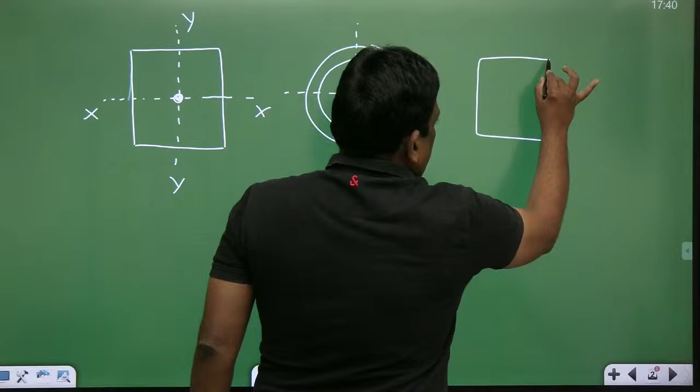Now, dear students, let us take the C section. There are two principal axes, principal centroidal axes. Let us assume this is one axis, XX, and this is the other axis, YY. Now, if you fold the top onto the half, you get exactly this. So it is symmetric about this axis.

What about this axis, YY axis? If I fold this, am I getting this portion? Absolutely no. When I fold this, I don't get this. This means this is not the axis of symmetry, and this is the axis of symmetry. So it has one axis of symmetry.

Now let us take this L section. It neither has any axis of symmetry. If you fold this, you are not getting this. If you fold this, you are not getting this. It has no axis of symmetry.

Now let us see what is happening. This concept which I am going to discuss is very important when the thickness is very, very small - for thin members. For example, please understand.

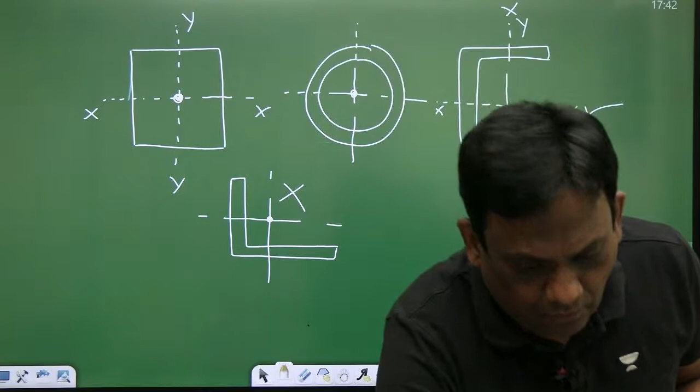Okay, no problem. Now observe here, sirs. Let us do one thing. Dear students, now let us also take this section.

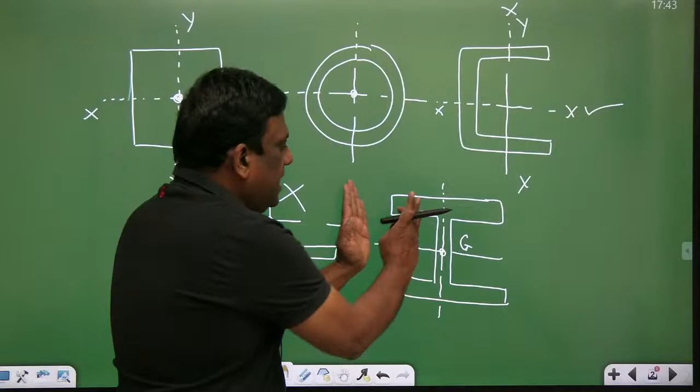Let us take a symmetric I section. What do we mean by symmetric I section? Look - these flanges are exactly the same thickness, same size. This is one axis, principal centroidal axis, and this is another axis. So if I fold the top one, I get the bottom one. If I fold the left one, I get the right one. So it too has a double axis of symmetry.

Whenever we have a double axis of symmetry, when the member is loaded like this - listen carefully - there is a member, say it is a rectangular section, or square section, no problem at all, or it is something like this, a circular section, no problem at all. Now...

Let us load like this. The load is passing through this G, the centroid. You will see that it simply bends, and you don't find any twisting. For example, let us take this rectangular section and apply a point load.

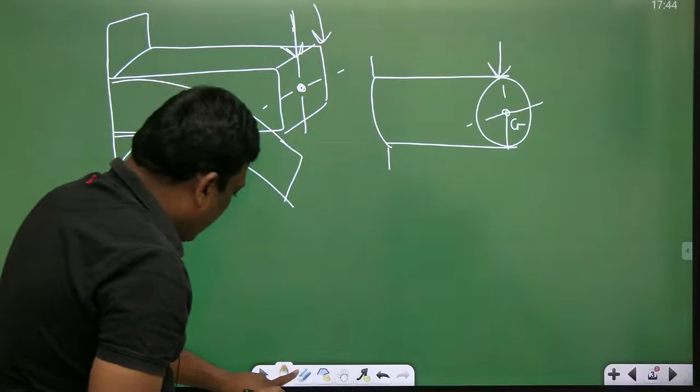It bends. Very good. Now something unusual is happening. But before we start that, let us try to understand this. Instead of applying a load here, let us apply a load somewhere else - let me erase this.

Instead of applying a load here, let me apply it eccentrically - this is known as eccentric transverse loading. This is transverse loading, this is axial loading. Beams are transversely loaded members. Let me apply a load like this. When I apply a load like this, you will observe very clearly. Now I'll replace this with something like this - look, this is the applied load.

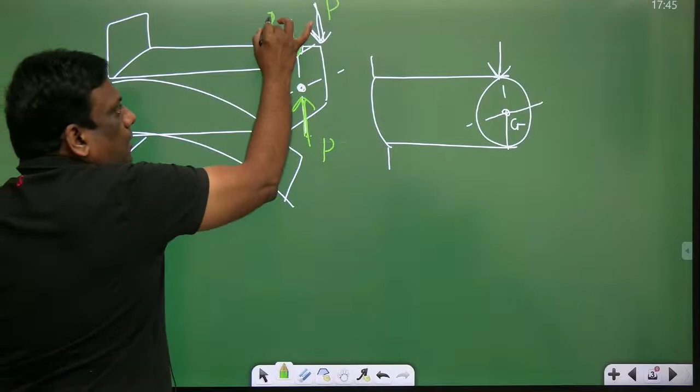From mechanics, if I replace this with two equal and opposite forces, look at what is happening - there is no net effect of these two. There is no couple formed by these two green forces, and the upward and downward P cancel with each other, so there is no net effect. Now look at what these two are trying to do - they are trying to twist this member. This means even when the member has double axis of symmetry, if the load is not passing through the centroid, and if the load is eccentric, then you find some twisting of the member.

So please, my dear students, don't think that when the load is passing through the CG, in case of double symmetric sections, there is no twisting, there is only bending. But even when you have double axis of symmetry, if the load is not passing through G, if it is passing somewhere else, it will twist. Very good, I think you have understood very clearly.

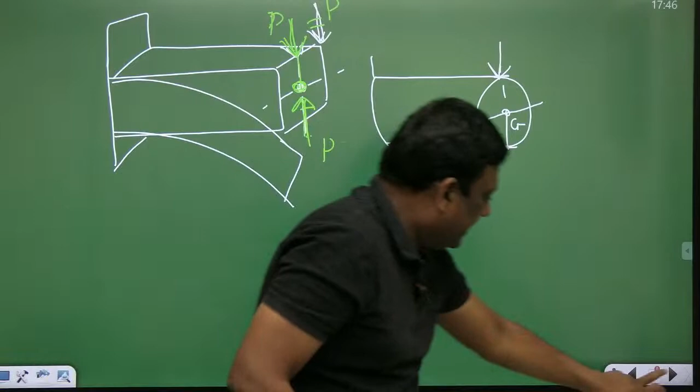Now whenever a member has two axes of symmetry, when the load is passing through CG, there is no twisting, there is pure bending. For example, take a circular section, let it pass through this, and take an I section which is symmetric. Both flanges are equal, and when the load is passing through CG, it's like this. I'll show you very clearly.

Today I will try my level best to give all the things about shear center. But the only thing, look here.

Now look, sirs, this is the member. Now I am applying a load here. Observe here, what is happening? Simply it is bending, because the load is passing through this G, and therefore it is passing through this. It has two axes of symmetry. So therefore there is only bending, but there is no twisting.

Exactly, wonderful my dear students. Don't worry about all these things, you will get everything in a crystal clear manner, it's my promise, but you should have patience. But something unusual is observed here.

Please look, sirs, please understand. Let us take a C section. Now you know this is one principal axis. This is another centroidal axis because CG is passing through this. But you know this is the axis of symmetry because if you fold this, you get this. But this is not the axis of symmetry, so when you are folding, you will not get this.

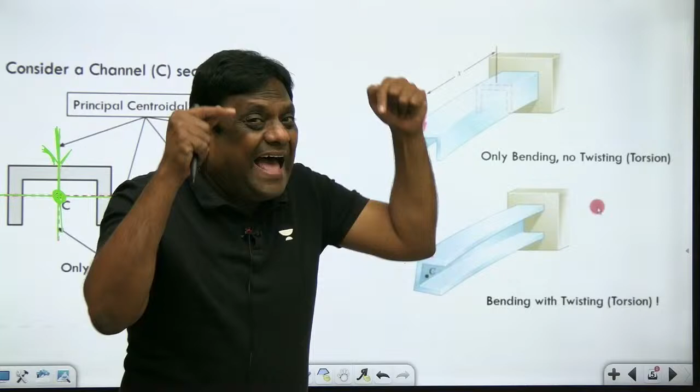Now look, sir, when the load is applied along the axis of symmetry, it's something like this. You just find bending, you don't find any twisting. You just find bending. When the load is applied along the axis of symmetry, this is the axis of symmetry, observe here. When you fold, you get this. So when you are applying the load along the axis of symmetry, you don't find any twisting, you just find bending. It's something like this, my dear students.

I will take this, let's see once. I will take this, look. Now this is one axis and this is one axis. Sorry, no problem, don't worry sirs, I will take care of everything, there is no need for you to worry. Look, now observe here, please observe.

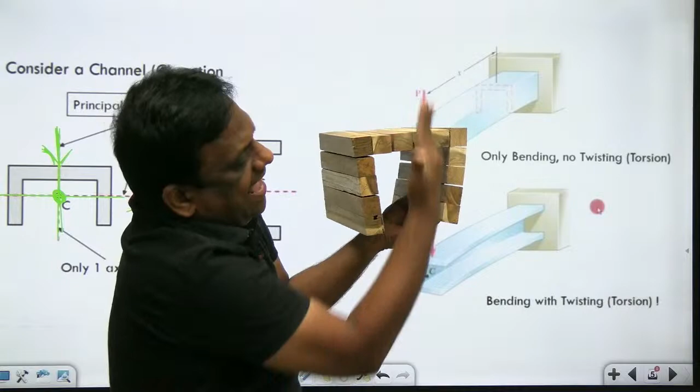This is one axis, so if I apply a load like this, this is the axis of symmetry, this is the axis of symmetry. If I apply a load like this, simply it bends. But now what we do is just try to reverse it. Let us take this, now you know centroid is somewhere here. This is one axis, this is the axis of symmetry. This is one axis, but this is not the axis of symmetry.

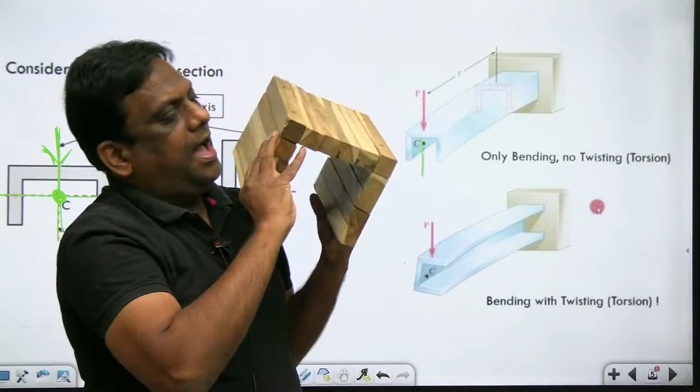Now I will apply load here. You just see, take casing pipes, electrical casing pipes, if you want to observe you can do that experiment. Now instead of applying a load along the axis of symmetry, look, now I will apply load like this. Look, now I will apply load like this. See once, now I will apply load like this. Is it along the axis of symmetry? No. So when I apply load like this, which is not the axis of symmetry, you find something like this.

Look, you just see warping, meaning it is twisting.

In which case is it twisting? When you have two axes of symmetry and when the load passes through CG, there is no twisting, there is only bending, when there is a transverse load. Even in case of double symmetry, when the load is not passing through G, if it is eccentric transverse load, there is twisting, no problem. That is obvious, we can understand, we can see that.

But now please understand, my dear students, in this case, look once. So now I am applying a load like this. But please note that this is the axis of symmetry because this and this are the same. So but now I am not applying like this, in this case we have applied.

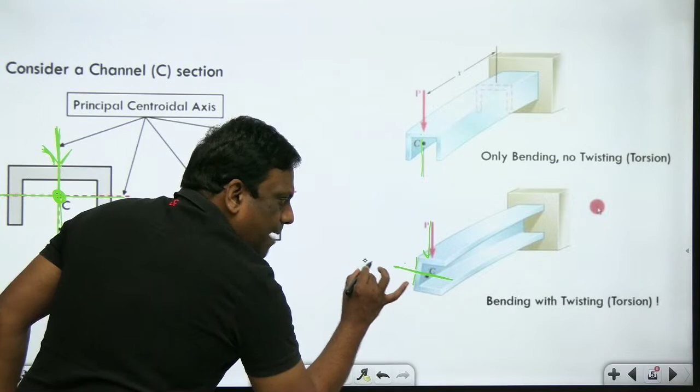So there is only bending, but here you are finding twisting. Let me show you the figure.

First we'll see what is happening, then we will see why it is happening. And physically we will feel by taking each fiber and opening it up to see. One request: patience is needed. Is everyone understanding so far?

Now sirs, I have applied a load like this. Look at this, is it along this, this is the center of gravity. Okay, now I have applied a load. This is the axis of symmetry, but this is not axis of symmetry.

So when I applied a load like this, you are seeing something like this. It is twisting, something like this. You have seen something like this. The cross section is twisting. Now let us see why that is happening.

And I will give you the concept of shear flow, and beautifully I'll be deriving that, something like in fluid mechanics we have seen whenever the discharge is splitting, this total discharge is equal to Q1 plus Q2. Here I am going to prove it and physically you will be feeling it. So till now is it clear sir?

If you say yes, then I'll proceed further.

Wonderful sirs, till now there is no problem. Wonderful my dear students, let's proceed now.

Look carefully sirs. Now what we do is, dear students, let us take this section. Let us take this, I have drawn it for you. So let us take this, wonderfully. Now one second, see this.

Let us take a C section and we have applied a load. It is a cantilever and the cross section is a C section. No problem at all, please visualize carefully. Now this is a C section.

And there is a point load here. Now tell me, this is the fixed end and this is the free end. So at the free end, we have applied a point load. You know very well, when I move in this direction towards the fixed end, what is the bending moment? For example, let this length be X.

So what is the bending moment at the section AB? It will be P into X. Absolutely fine, so this is the bending moment at section AB.

Now let this length be dx. So what I am doing is, you tell me what is the bending moment at EF. Dear students, here we need the bending moment. And you know this distance is dx. So load is P, and the distance is x plus dx, so therefore it will be P into (x plus dx). Absolutely fine, there is no problem at all.

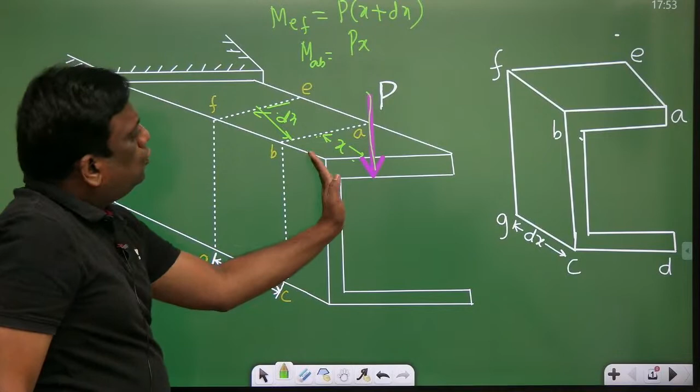So what is your observation? When I move towards the fixed end, the bending moment is increasing linearly because it is a function of x. So it is increasing linearly with the distance. Now, there's no problem here sir.

What we do is, dear students, I will cut this. I will take any section which is at a distance x. Listen carefully, what is this distance? What is this distance x? It is at a distance x from here. Now please observe, and this length is dx.

So what have I done? I have taken this section and this is removed, and this length is dx. So it's like this, look carefully, please listen carefully. What I have done, see this section.

This is one, A B C D. See it once, A B C D, A B C D. And the back one, see it once. This is E F G H, E F G H. And this length is dx, so this length is dx.

I repeat sir, see it once. A B C D is the front portion, back is E F G H, and this length is dx. So I am showing you like this. See it once, we'll write it here sir.

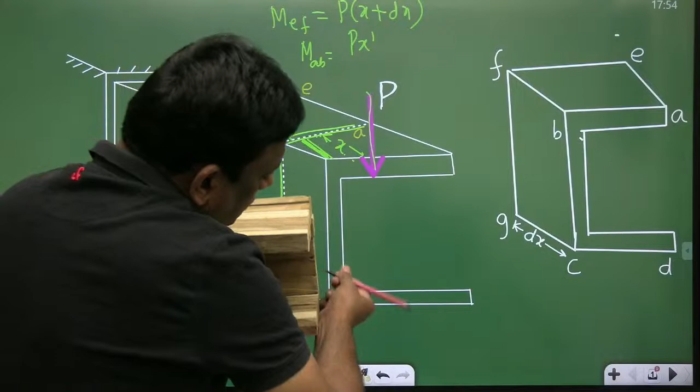Do not worry, so I read this as A B C. You may not be seeing it clearly, no problem, but I'll be showing. This is A B C D, and the back side is E F G H. Don't worry, and tell me what is the length. See it once, don't worry, even if you cannot see, there is no problem. Now observe here, see this sirs.

This is the one, I am showing you this portion. What is this length? This perpendicular to the plane of the screen. What is this length? Dx. So I have taken this, now observe carefully.

If you understand carefully, we are taking very thin sections, sirs. I'll explain with beautiful logic. So have you understood the section? If the section is understood, there will be no problem at all.

If you understand the section, look here, I have taken it like this. A B C D and E F G H, and this length into the screen, this length is dx. So this length is your dx. I'll write it here, I'll write this too. This length is dx, no problem at all. This length is dx, absolutely fine.

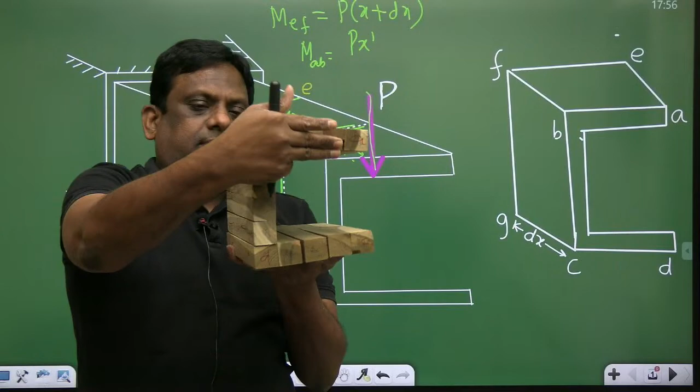Not visible, no problem sir, I'll show you, this length. This length is dx, this length is dx. Okay, no problem at all. Let's proceed, sirs, let's move ahead. No problem at all. Absolutely fine, so this is understood, right? This is front ABCD and back is EFGH and this length is DX.

Observe clearly now, look at one thing sir. So please listen, this thickness is very small. Now tell me, do you know the concept of complementary shear? What is the concept? I will explain it a bit. You don't have to worry about that.

I'll explain, sir, look here. Assume that there is a member. I'll clear it up completely, sir, don't worry. There is a member like this, very carefully look, there is a member like this. Absolutely fine, so this is.

If these two are trying to rotate in this direction, the resisting should be in this direction. So look, such right and left. Not understood? Let me explain very clearly. I'll explain again sir, you all are not understanding, because this is the basic concept.

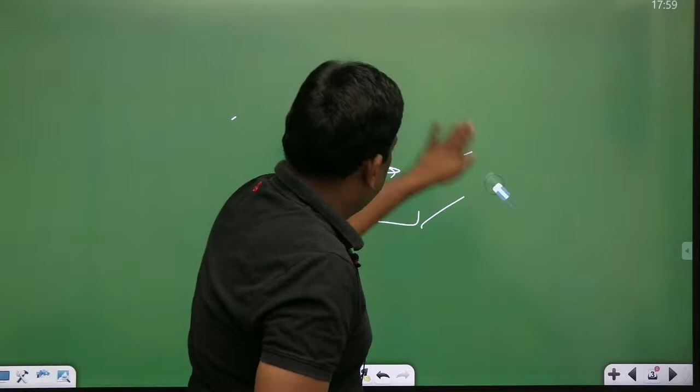There is no problem at all. Till now, there is no problem. So let us proceed, my dear students. We will study calmly, without tension, no problem at all sir.

Look here, till now there is no problem. Look, there is a small section, a thin section, very thin. Let the thickness of this be T. I'll ask you one question. Tell me sir, if it is a very thin section, now you know, now we are loading. Listen carefully sir.

What is the shear stress at the top? Look at this, it's like this. You tell me, what is the shear stress at the top? No shear stress. Please understand carefully, why would there be shear? Now observe, let me show you the loaded member.

Now you tell me, is there any material above this? Is there anything above? No. Is there any material above? No, so there is no shear stress. And what is the thickness? You know very well.

Now look, we'll do one thing. Let us take a very large thickness, this thickness is very large, and we will compare this situation: one thin and the other thick. Please observe clearly, what is happening here.

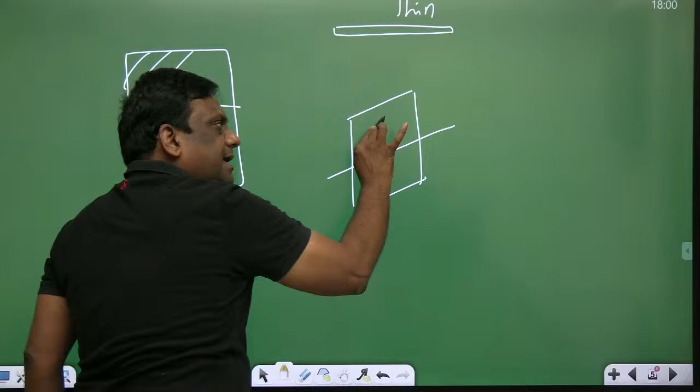Because there is this much material, when there is a load like this, understand carefully, very simple. Now see, this is the neutral axis, assume the material is very thick. If there is a movement like this, what will happen in the cross section? If a force is acting like this, let us take this portion.

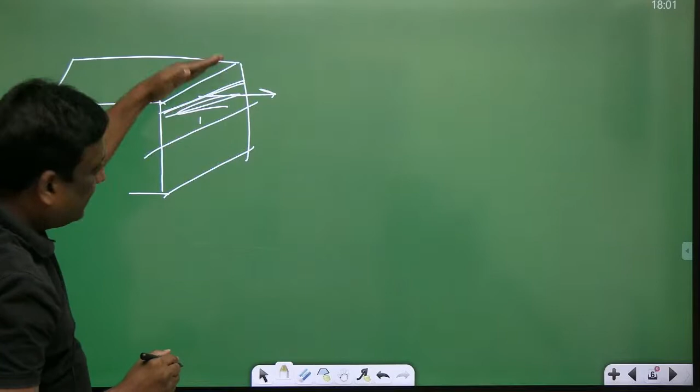Already we have discussed this in our regular classes. But now if it is very thin - if the thickness is very large, it's something like this, my dear students. Try to understand, look at this cross section, thickness is very large.

So if there is a bending moment like this, listen carefully, this is the large thick one. Thickness is large, so if the bending moment is acting like this, see what is happening - there is a shear. In which direction is there shear? In this direction there is shear.

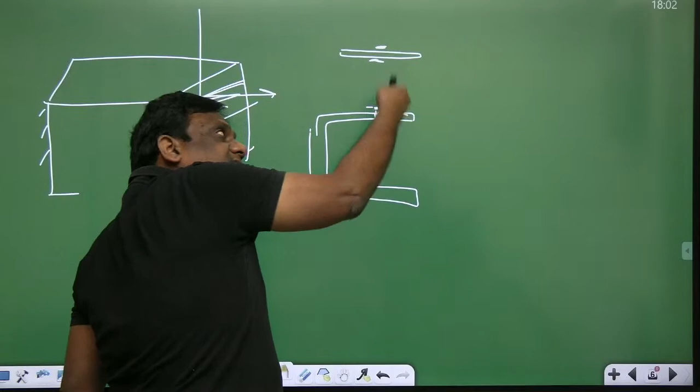But if the thickness is very very small, what is the shear stress at the top? There is no material above, so no shear stress. So as the thickness is very small, what is the shear stress here? Zero again. So here at the top and bottom, if you take a section, what is the shear stress at the top? Zero. What is the shear stress at the bottom? There is no material, so in this thickness direction there is no variation, there is no shear stress.

Negligible, I can say negligible. If the thickness is very large, then definitely there will be shear stress. Have you understood this, sir? At the top what is the shear stress? Zero. At the bottom there is no material, zero. So therefore when the thickness is very small, here it is zero, here it is zero.

So in this it is almost zero. But if it is very thick, look, it's like this, my dear friends. If it becomes very thick and I apply a force like this, yes, there is a shear. But if it is thin, at the top it is zero, at the bottom it is zero. So therefore in this direction, as the thickness is very small, the shear is zero. This means, please understand carefully, in this direction the shear will be zero based on thickness.

Now what do I mean by this? Let me explain. Please understand carefully, let us take this.

देखो एक बार, here the shear is zero, here the shear is zero. Now actually मान लो there is a shear. अगर shear है तो क्या होगा सर?

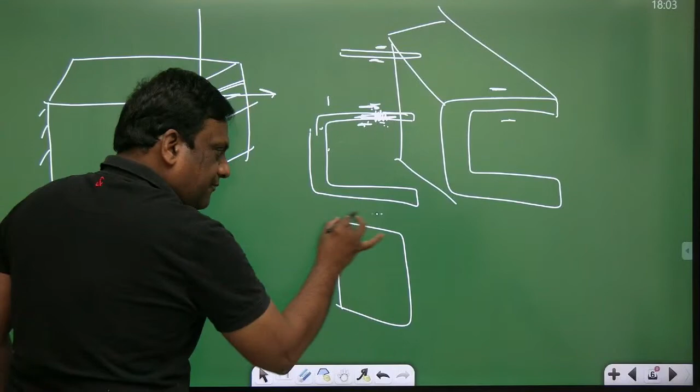If it is very thick, look carefully, if there is a shear, अगर ऐसा shear है तो if it is anti-clockwise, there will be clockwise. That's why I said head to head, tail to tail, head to head, tail to tail. तो ये डायरेक्शन में shear आएगा कब?

When it is very thick, if there is a shear stress in this direction, देखो carefully, please don't get confused. If the material is very thick, and definitely when you are applying like this, there will be shear like this. अगर thickness बहुत ही कम है, तो here it is zero, here it is zero. So in this it is almost zero.

तो देखो एक बार फिर से बता रहा हूं सर। Now what we try to do is, then why without this shear, why is the twisting coming? ये बहुत ही इंपॉर्टेंट क्वेश्चन है सर। यस, अब देखो, अब मैं पूरा डिटेल वे में बताऊंगा।

Now understand carefully here, हो क्या रहा है एक्चुअली फिजिकली, what is happening? देखो मैं क्या बोल रहा था, what was I telling you? For example, एक सेक्शन ले लेंगे सर, मैं बोलने का क्या था, ऐसा एक सेक्शन ले लो।

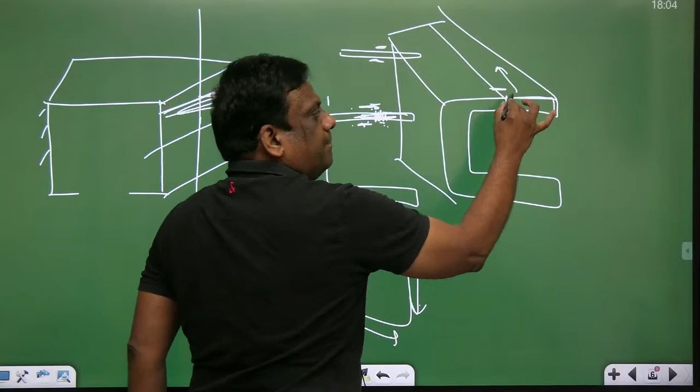तो देखो यहां पे शेयर क्या है, जीरो है। तो अगर ये शेयर जीरो है तो ये भी जीरो होगा। जब ये जीरो होगा, so when this is zero, this will be zero। मतलब इसमें प्लीज ऑब्जर्व, in this direction there are no shears in this direction।

अब इस डायरेक्शन में है या नहीं है, अब देखेंगे। Let me tell you very clearly again। अभी आपको नहीं आया या नहीं आया, प्लीज नहीं आया तो पूछो, मैं अभी बताऊंगा सर। I will tell you again, let me tell you very clearly। आपको नहीं आ रहा है, मैं बताऊंगा सर।

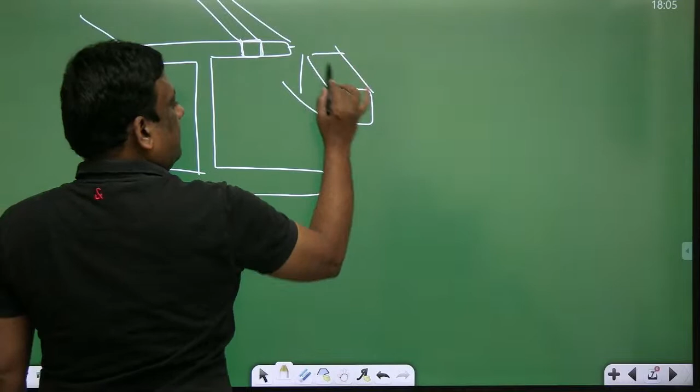Let us take a thin section। ये थिकनेस तो नेग्लिजिबल है ना सर। अब ये वाला ले लेंगे, something like this, लेट्स टेक दिस। ये वाला, so I am taking something like this।

जब ये जीरो हो रहा है तो ये भी, मैं बोल रहा हूं सर, what I am saying is when this is becoming zero, this will also become zero इस डायरेक्शन में। अब ये डायरेक्शन में छोड़ दो, ये डायरेक्शन में मटेरियल आ रहा है। क्यों मटेरियल आ रहा है? यहां पे मटेरियल कम है, यहां पे मटेरियल बढ़ रहा है। So in this direction material is increasing, but along the thickness the material is very less, so these variations are very less।

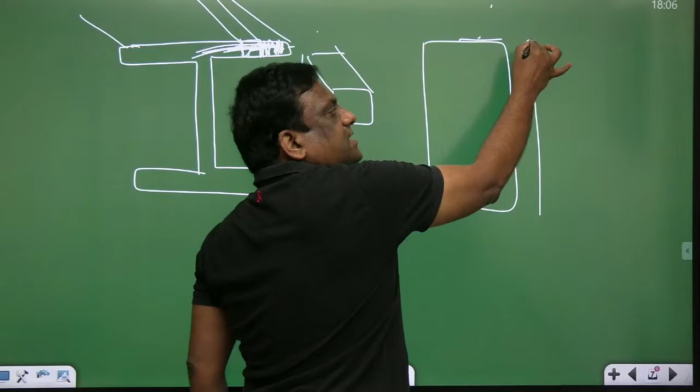If the thickness is appreciable, we have already seen in our regular SOM classes, along this, ऊपर कोई material नहीं है, shear stress is zero। नीचे कोई material नहीं, shear stress is zero। And we have seen parabolic variation।

Very good sir, what I am trying to say now is a very simple point। ऊपर there is no material, no shear। So look, here more material is there, therefore there is more shear। तो इधर देखो ना, so for example, I take this thickness, तो क्या होगा सर, shear stress क्या होगा सर? If I take very small thickness, what is the shear stress?

यहां पे जीरो होना है, here it should be zero, here it should be zero। So therefore it is negligible। In this direction shear is negligible। ये पॉइंट सभी को क्लियर हुआ या नहीं? This is clear, then I can proceed।

If this is clear, then I can proceed। बोलो, if this is clear, then I can proceed। Clear, wonderful sirs, wonderful, no problem at all, absolutely fine, there is no problem at all।

अब देखो sirs, मैं क्या बोल रहा हूं, अब पूरा समझ में आएगा आपको। Now you can understand everything very clearly। So what I have done is, dear students, ये section लिए। Have you understood this section?

Now look carefully, when the bending moment is applied like this, and you know this is the neutral axis। तो न्यूट्रल एक्सिस के ऊपर के लेयर्स पूरे, all these will be in tension, and न्यूट्रल एक्सिस के नीचे, all these below the neutral axis, all these will be in compression। These will be in compression।

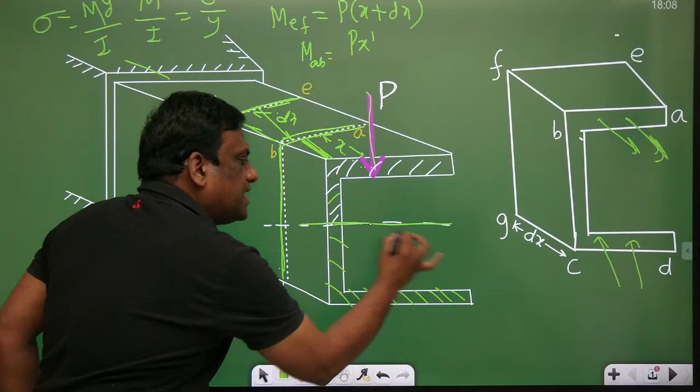Now look, sir, what is y? Distance from the neutral axis. Look carefully, all these are at the same distance. See, this height is the same. So please understand carefully, dear students, this is what I am telling you.

Please look, this is my dx. Now I have it like this. We have taken this section. I applied a bending moment like this, showing it on this axis. This front one is ABCD. So what will happen? These fibers will be in tension and this will be in compression.

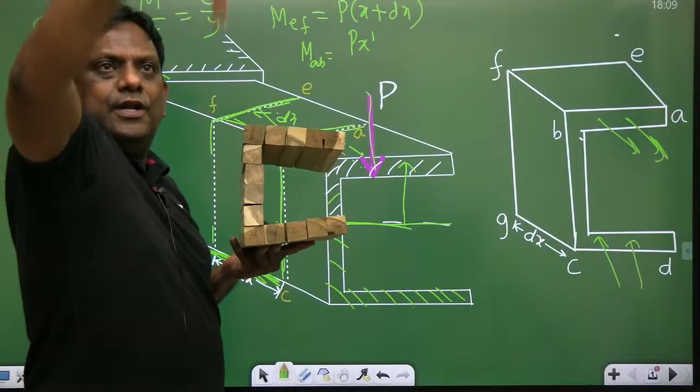But please tell me, is the bending moment same here and here? If this is the fixed end from the board, and this is also a section, here the load is applied. If you see the bending moment here, it will be less. If you see the bending moment here, it is at more distance, so definitely the bending moment is more here.

So please understand, my dear students. Has everyone understood so far? Is it clear up to here? Now look at this. Don't worry, I will clarify it calmly.

Don't worry, dear students, let the bending moment here be m. What is your bending moment here? P into x. So what will be the bending moment here? P into x plus dx. So if here the bending moment m equals P into x, what will be the bending moment here? It will be P into x plus dx. So I will write this as m plus dm. Hope you have understood, I will write this as m plus dm.

Now look, the top fibers are in tension here and the top fibers are in tension here too, and the bottom ones are in compression. Now tell me, the bending moment here is m plus dm, and the bending moment here is m only. It means there is a difference in bending moment. Hope you have understood. Now what happens because of this, let's see once.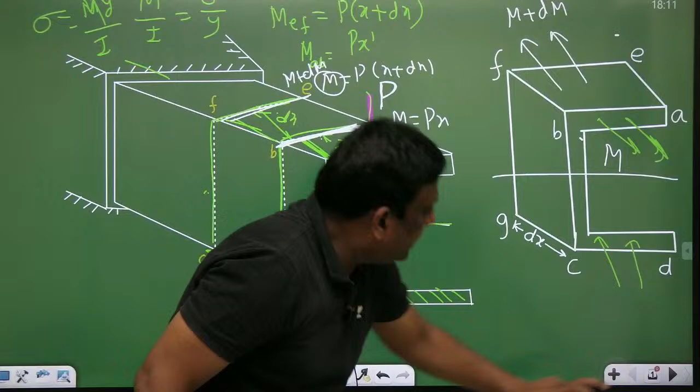Let me take this, calmly sir. Don't worry at all, do not worry at all. Look. I have taken an element. What is the length, sir? The length is dx. So look, this is your section.

Now look, let me take this length as the total length, and these are very thin sections. If they are thin sections, the distances are measured center to center, it won't make a difference, sir. So from this center to this center, let us take the distance as h. And from this center to this center here, let us take it as b. So please observe here, don't say the thickness is very small, so I am measuring center to center. This is h and this is b.

Now look, this is the neutral axis. Now tell me, what is y? You know the bending stress is maximum at the farthest distance. You may be wondering, sir, won't the bending stresses vary here because y is changing?

This thickness is very small. When the thickness is very small, my y is almost constant from the neutral axis. This thickness is very small, it is very less, so what will my y be? This is my y. So as the thickness is very small, my y is almost the same. So all these fibers have almost the same bending stress, because bending stress varies from the neutral axis.

Now look, here the bending stress is different because y is different here. But as the thickness is very small, hope you are understanding. I will explain again, sir. Look here, as this thickness is very small, it is like this. Look, this is the section.

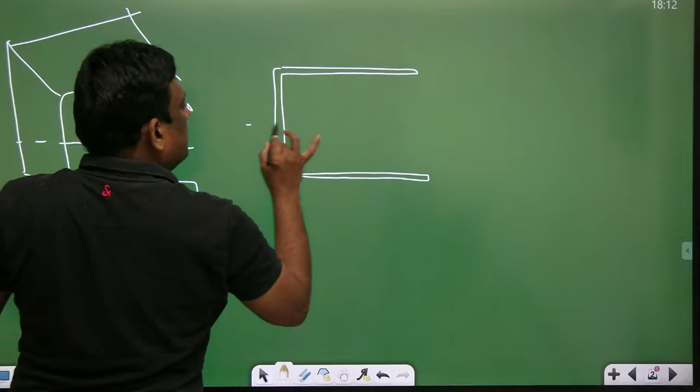This is the neutral axis. Now, I have taken this point - what will be this distance, sir? Can I write this as h by 2?

So all these are at the same distance, so bending stress is same throughout this. Now, but what is the bending stress at the front? You know very well, m by I is equal to sigma by y. So what is sigma, sir? my by I. Very good.

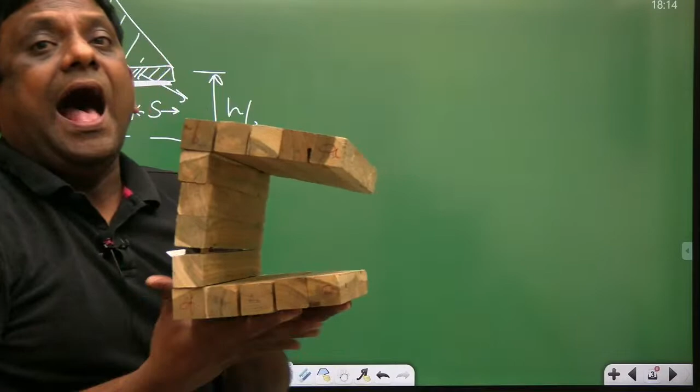Top fibers are in tension, but definitely as the bending moment is more at the back, this force is more compared to this force. Now look carefully, when this force is more compared to this force, the bending moment is more here, the bending moment is less there. So when this back force is more, it will pull this.

When it is pulling like this, there will be shear in this direction. Now you must have understood. There will be shear in this direction. Have you followed, sir? Please tell me, is it clear, dear students?

Now what we will do, we will calculate here, sir. What is the bending stress? m/i is equal to sigma/y. What is y? This is the neutral axis, so can I write this as y? Now, all these are at almost the same distance, so the bending stress will be same throughout this. So sigma is equal to my/i.

Can you tell me, please note down, what is I? It is the moment of inertia of this complete section about this bending axis. It is bending in this plane, about this axis. Wonderful. So now tell me, m/i, I is the moment of inertia of this complete section.

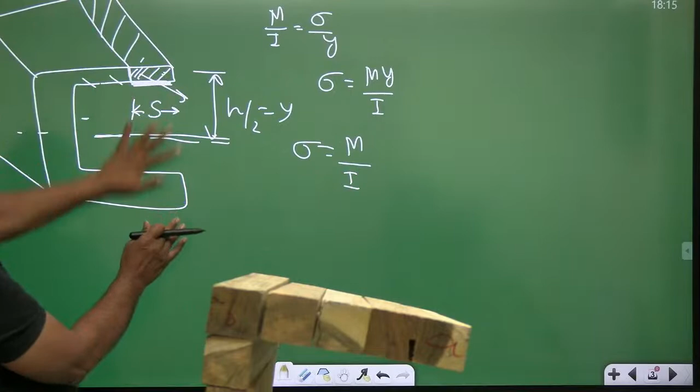Y - can anyone tell what is y? So from the neutral axis, this is y, so it is h/2.

Very good, sir. Now same, if you want at the back, same. This is at the front, this is at the front. At the back, look carefully - at the back, what is the bending moment? So now tell me, what is the bending moment?

I will write this as bending moment is m plus dm, because the distance is not px, it is p into x plus dx. Is it clear, sir? Is it clear, my dear students? Now you're not understanding - how are you students? Look here, I'll show this diagram, then you will understand. Let's see this diagram.

Now look at this diagram, look here. I am saying we took this section. Look here, please look at this one. So here, please understand, you will understand now very clearly. So here it is.

What is the bending moment? Here it is - the top fibers are in tension. This will happen, so what will happen here, sir? It will be like this. So tell me sir, you tell me sir - this bending moment is less, this bending moment is more. If the bending moment is m here, this will be m plus dm.

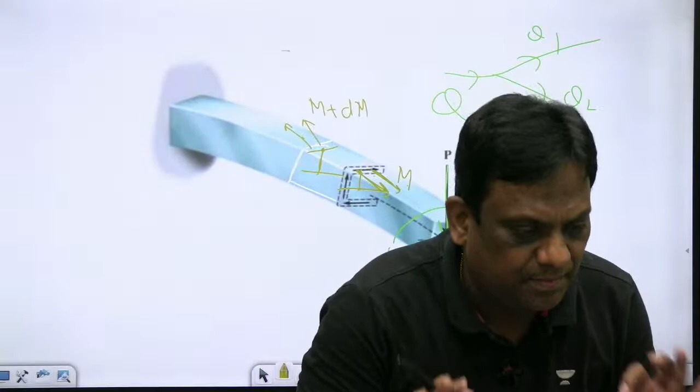So what will it be? All are at the same distance - this is h/2, this is also at h/2. Please tell me, is it clear to you all, sir? Please tell me, is it clear? So if you say yes, then I'll proceed. Where did our equation go?

Now look at this. Wonderful sirs. Now it will be m plus dm, m/I is equal to sigma/y. My m is m plus dm, sigma is m plus dm by I into y. What is y? So whether it is front or back, they are at the same height, from the neutral axis.

I want this distance from the neutral axis, whether front or back. Neutral axis to h/2, and the back one is also h/2. So hope you have understood.

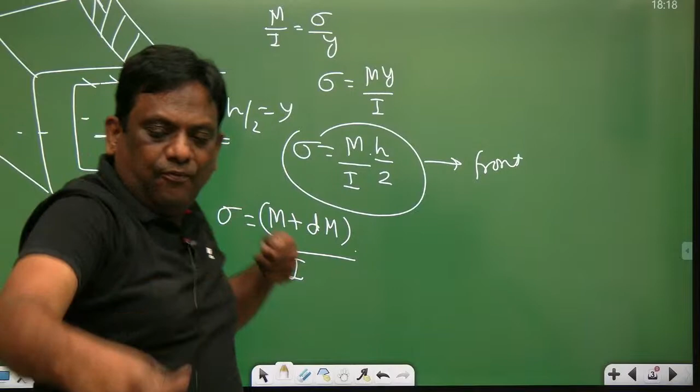So now as the load is applied like this, the front one is in tension, back one is in tension. But as the bending moment is more at the back, force is more. So therefore now the net force acting on this.

Look, what strip have I taken, sir? Let me show you. Everyone knows what is this length? dx. Now what have I done? I have taken this length. Let this length be, I'm taking one fiber.

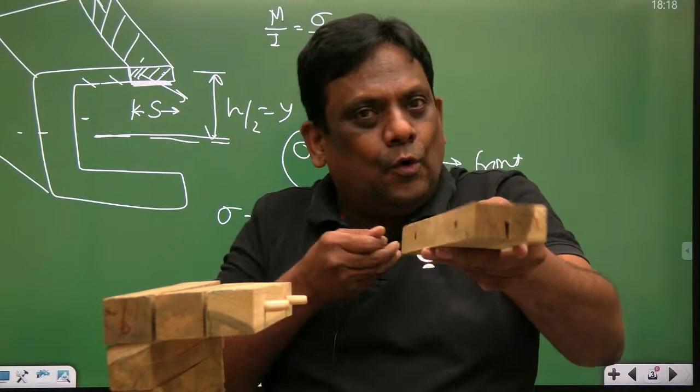Now let me calculate the net force. All of you, have you followed? Have you followed, John Philip, wait. Now you can message me. So now I will write.

Like one second. What will be the force, sir? You have calculated only stress. What will be the force here?

Now let's take this element, sir. Please listen carefully, I will take this element. Same element I am taking, look here sir. One second, one second, I will erase this a bit. Don't worry, don't worry sir.

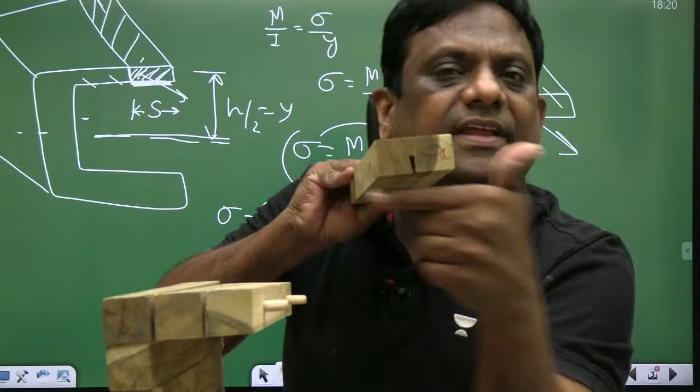There will be force on this. So this is stress into area. What is this area? Anyone? This length I have taken as s and this thickness is t. So therefore now this length is s and this thickness is t. So what will be the force?

Already on the front, load has come, stress has come. So m h by 2I into this area. So this is the stress into area. What is the area? S into t. Wonderful sirs, now what will be at the back?

Anyone? Same m, in place of m, m plus dm. Excellent, m plus dm. Everything is same. h by 2I into st. Now please observe here. Now you know if I apply a moment force like this, the top one is in...

The top one is in tension, the bottom is in compression. So definitely this tensile force is less compared to the backward one. So what will happen? So there is a net backward force. If there is a net backward force like this, is it coming back?

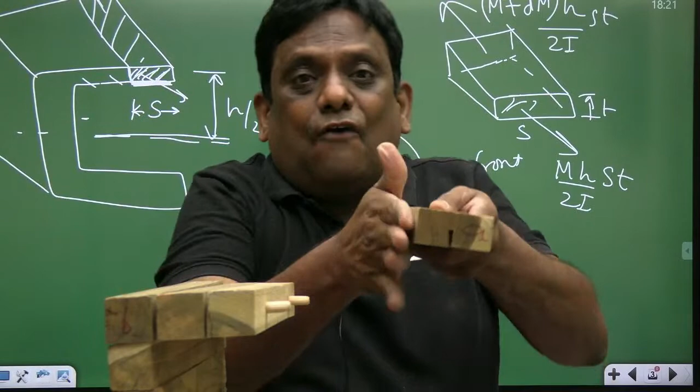No, meaning the adjacent layer is offering a shear on this. The adjacent layer is offering shear on this. And you know this length is dx. Is this making sense, sir? The adjacent layer, so therefore when it is coming like this, adjacent layer will offer.

Oh dear, it is coming back like this. When it is coming back, it's not coming back. Meaning someone is opposing. Who is opposing? This adjacent one, it is opposing like this. So the force acting on this will be in the forward direction.

The force acting on this will be in the forward direction. If it's forward on this one, it will be backward on this one. So therefore this is the total force, and this force is opposing, resisted by this.

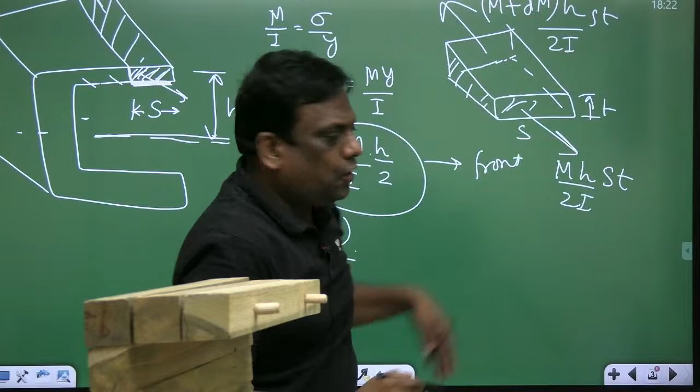Now I will write very clearly. This one is resisting. If the shear stress here is tau, what will be the difference, the net force? Net force is equal to this minus this. What do we get? So you will get dm. If we take the difference, mhst by 2i, what remains is dmhst by 2i, and that is actually the unbalanced force, supported by this.

If the net force is backward, in which direction will the resisting force act? If net is backward, the resisting will be like this. If this section is at a distance x, at a distance s, if the shear stress is tau at that distance s, now tell me what will be this force, and this force should balance, and that should be equal to this unbalanced force. You know the length.

Please observe and understand carefully. There is an unbalanced force in the backward direction, and this is resisting it. If the shear is tau, and you know the length is dx and the thickness is t, then this should be equal to tau into dx into thickness t.

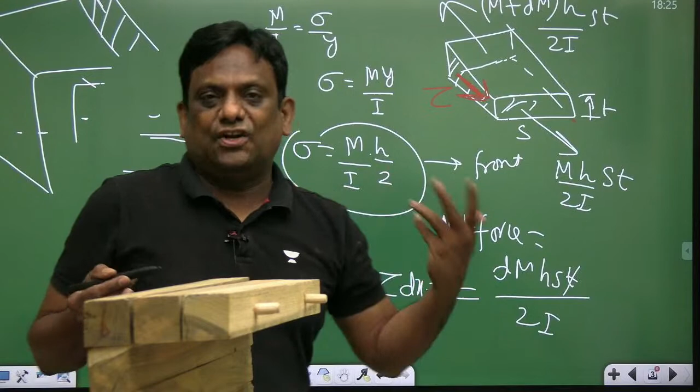Can you tell me what is dm by dx? We have already studied this in strength of materials: dm by dx is the shear force. So let me write dm by dx as V. This is the shear force, dm by dx is shear force, times hs by 2i. Absolutely fine, no problem at all.

Is it clear to everyone up to here, sirs? Till now is it clear? Till now is it clear, sirs? Till now is it clear? Wonderful, my dear students, we got the shear force.

The equation for shear force is, please listen sirs, please listen. So at this section, which is at a distance s, the shear is given by V, hs by 2i. What was the equation? V hs by 2i.

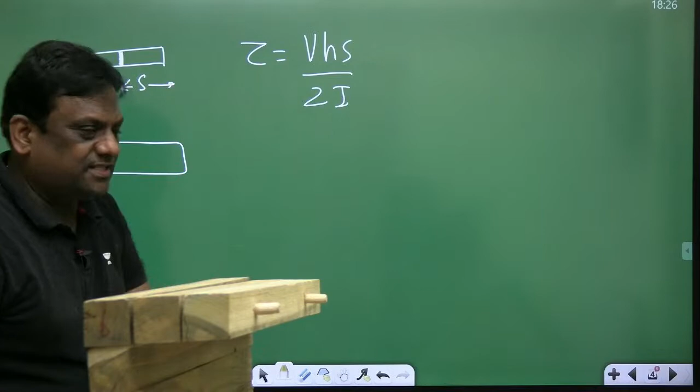Please listen carefully, let's see how the shear stress is varying. At a particular section, the shear force is constant since we are not changing the height. The moment of inertia of the complete section is constant too. And S is varying. So as S is increasing, starting from S0 and increasing like this, how does the shear stress vary with S? It is varying linearly, therefore it is varying linearly.

Has everyone understood up to here, sir? Have you followed, sirs? Have you followed, my dear students? Now we'll see the beauty of this, sirs. Let's try to understand this very clearly. Has everyone understood up to here? Okay, okay, look sirs.

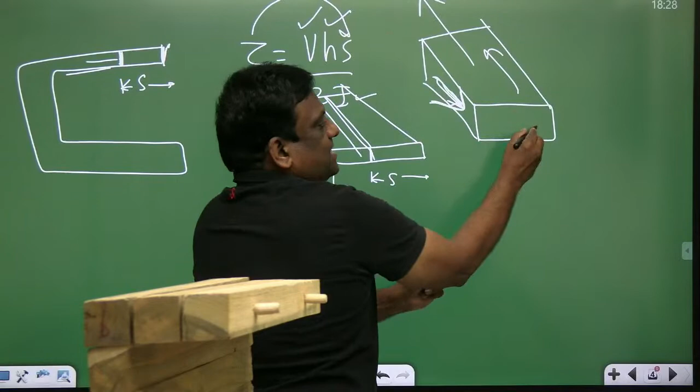तो अगर यहां पे शेयर ऐसा है, प्लीज ऑब्जर्व क्लियरली. इफ द शेयर इज लाइक दिस, तो अब क्या होना चाहिए, अगर ये ऐसा रोटेट हो रहा है, अगर शेयर ऐसा हो रहा है, तो इस पे बैलेंस के लिए कैसा होना चाहिए सर, हेड टू हेड. तो इट मींस इस डायरेक्शन में ऐसे आ रहा है सर.

अगर यहां पे इस पे अगर शेयर ऐसा है, इट विल ट्राई टू मूव लाइक दिस, सो टू अपोज दैट इट इज कमिंग लाइक दिस हेड टू हेड, मींस इस थिकनेस सेक्शन में एक स्ट्रेस ऐसा आ रहा है. प्लीज टेल मी आर वी क्लियर डियर स्टूडेंट्स?

नहीं आया सर आप लोगों को, प्लीज टेल मी, मैं दोबारा बताऊंगा सर, प्लीज डोंट गेट कंफ्यूज, एक बड़ा फिगर ड्रॉ करके आपको बताऊंगा, दैट्स व्हाई बेसिक्स आर इंपॉर्टेंट सर.

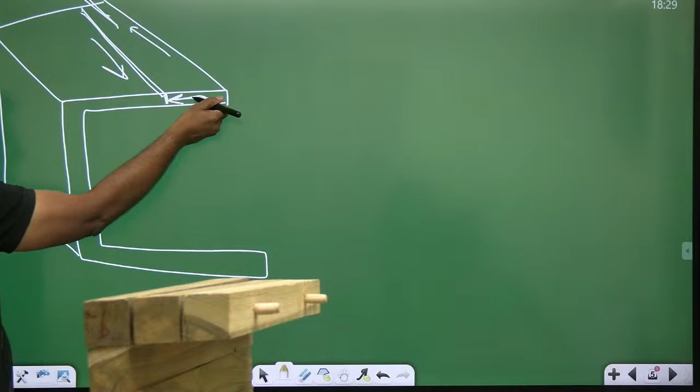देखो अब देखो, प्लीज लिसन नाउ, आई हैव टेकन दिस सेक्शन सर. अब ये वाला सेक्शन पे बताएंगे, तो नेट दिस इज मोर, ये वाला फोर्स ज्यादा है पीछे वाला, तो शेयर कैसा होगा, इस पे ऐसा होगा. प्लीज अंडरस्टैंड, हेड टू हेड, सो अगर ये ऐसा हो रहा है, एंड हियर इट शुड बी लाइक दिस, सो देयरफॉर हेड टू हेड कॉम्प्लीमेंटरी. इसका मतलब क्या है सर, एक स्ट्रेस ऐसे आ रहा है, सो लाइकवाइज, बट इट इज लीनियरली वेरिंग.

व्हाई इट इज लीनियरली वेरिंग? ऑलरेडी यू हैव रिटन एन इक्वेशन, व्हाट वाज दैट इक्वेशन सर? Tau equals VHS by 2I means the shear force at a section is constant, H is constant, I is constant, tau is directly proportional to S. इसका मतलब वो linearly increase हो रहा है यहां तक, the shear stress is increasing linearly up to this. So it is like this, यहां पे कम है, यहां पे ज्यादा है, so therefore it is moving something like this.

Please बताइए, is the direction clear? Is the direction clear my dear students? क्या ये direction clear, सबको पता चल गया? Please tell me, if you say yes, then I'll proceed. Is the direction clear? Now understand carefully. But यहां पे क्या होगा सर?

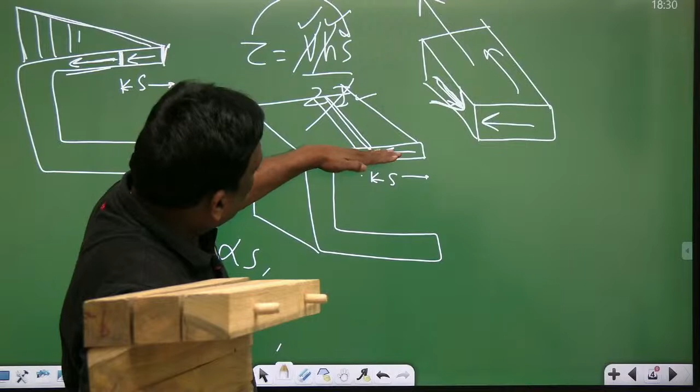ध्यान से सुनो सर, यहां पे क्या होगा? You tell me. On the top there was tensile, at the back it is compressive. टॉप पे टेंजाइल था, इसलिए ऐसा फ्लो हुआ. बैक पे, नीचे क्या है? कंप्रेसिव. लुक एट केयरफुली, एट द टॉप देयर वाज टेंजाइल, सो इट वाज बेंडिंग लाइक दिस. सो टेंजाइल था तो ऐसा फ्लो हो रहा था. अगर कंप्रेसिव है तो उल्टा फ्लो होगा. इफ यू वांट मी टू डिराइव, आई कैन डिराइव एंड एक्सप्लेन आल्सो, बट आई थिंक इट्स नॉट नेसेसरी.

इज इट क्लियर सर? इज इट क्लियर माय डियर स्टूडेंट्स? यहां तक सभी को समझ में आया? Is the flow clear, sir? Is the flow clear?

Is the flow clear? तो इसका मतलब है as there is, देखो यहां से क्लियर करूंगा सर, प्लीज. आई विल टेक दिस वन. हाँ, तो as this force is more, look at, कहां गए रहे हो?

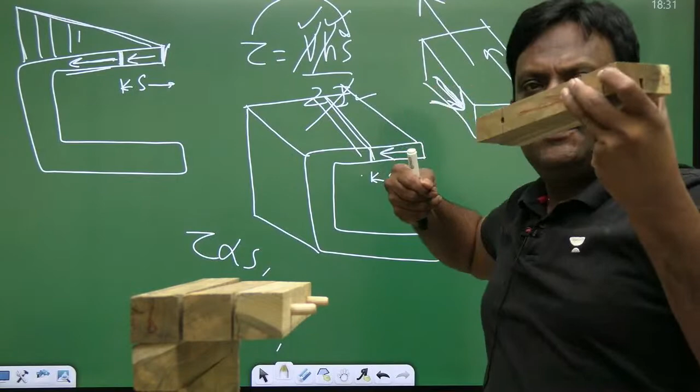सो द शियर इज रेजिस्टेड इस डायरेक्शन में। फ्रंट वाल इधर देखो ऐसा रेजिस्ट हो रहा है। As it is trying to move, shear is like this। अगर यहां पे ऐसा आ रहा है तो यहां पे हेड है, तो if it is tilting like, if it is moving like this, resisting should be like this, complementary। So therefore head to head।

अब देखो head to head, तो ये वाला head, ये head, तो therefore if this is the C section sir, इधर देखो अगर ये C section है तो इधर से कैसा फ्लो हो रहा है? देखो ऐसा ऐसा आ रहा है। इधर the stress is less, here it is more, here it is more, and it is increasing and likewise it is flowing। So similarly इधर क्या होना चाहिए?

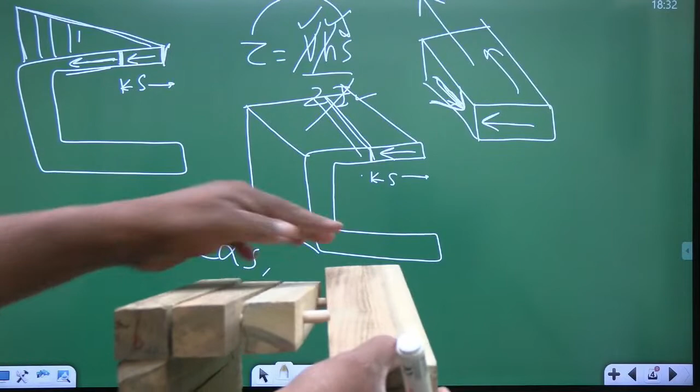अगर इधर अंदर आ रहा है तो यहाँ पे फोर्सेस आर, let me explain sir, आपको नहीं दिख रहा है ना। अगर इधर ऐसा आ रहा है, please look at carefully। So please let me explain। Don't worry, मैं हूं ना। देखो ये है, please observe।

तो actually this backward force is more because the bending moment is more at the fixed end। Fixed end आपके क्या बोलते हैं, स्क्रीन के तरफ है। So as the backward force is more, the shear is resisted in the front direction। देखो front direction, अगर ये front है तो ये ऐसा हो रहा है।

अगर ये front है तो ये shear इधर back होना चाहिए। अगर ये ऐसा हो रहा है तो resisting should be like this। तो it means इस face पे it's coming like this। So these are the faces, therefore it is coming like this। ये पूरे faces है, देखो यहाँ पे निकाला मैं। Please observe here, सो यहां से निकाला, सो ये ऐसे आ रहा है सर, ये ऐसे आ रहा है।

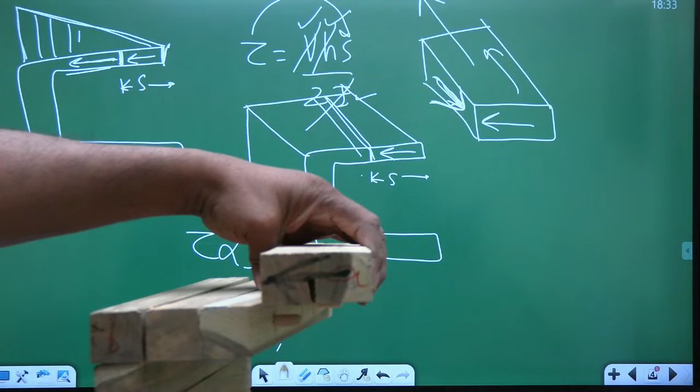तो ऑन द टॉप अगर लेफ्ट आ रहा है तो बॉटम, ये टेंजाइल है तो लेफ्ट आ रहा है, तो कंप्रेसिव है तो किधर आएगा सर? ये राइटवर्ड फ्लो हो जाएगा। बट नाउ द क्वेश्चन इज, सो ऐसा आके इधर आ रहा है, बट व्हाट इज द डायरेक्शन इन दिस वेब? ये तो फ्लैंज में देखे सर, व्हाट इज द डायरेक्शन इन द वेब, अभी एस्टैब्लिश करेंगे। Till now is it clear sir? क्या ये बात सभी को समझ में आ गया सर?

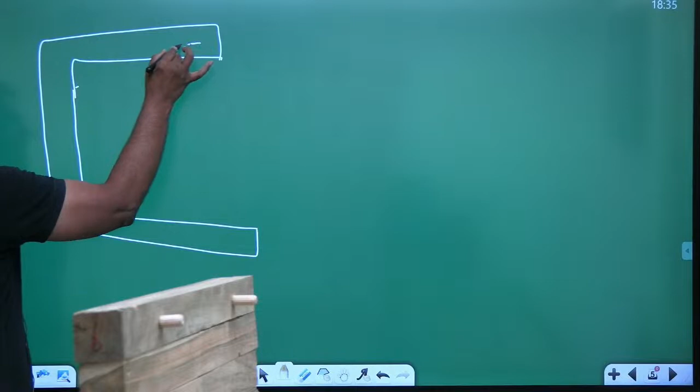It is increasing linearly. Now the question is, this is okay because both are of opposite nature. What do you mean by opposite nature? Here it is tensile and here it is compressive. For tensile it is leftward, for compressive it is rightward. What about this? Let us see.

Let's see what this means. Now have a look at this, wonderful, listen carefully. Please listen carefully, can you tell me what is the shear stress here? Look carefully, now comes the beauty, please look.

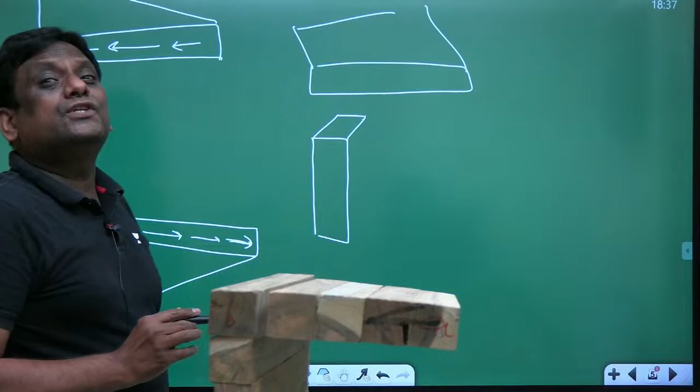Every complete force is in the backward direction. So please observe, if the complete force is in this, this one is the flange, the top flange, this is the web, I repeat, this is the web and this is the flange. I have removed the flange. Flange is exerting a force in the backward direction.

Please observe here. Flange is exerting, this flange is exerting backward force on this web, yes or no? Because on this there is a complete backward force. If this is completely backward, this complete flange will exert on the web in the backward direction. But on this it will be forward.

Don't get confused. There is an unbalanced force in the backward direction like this. When there is unbalanced force, this web will oppose in this direction.

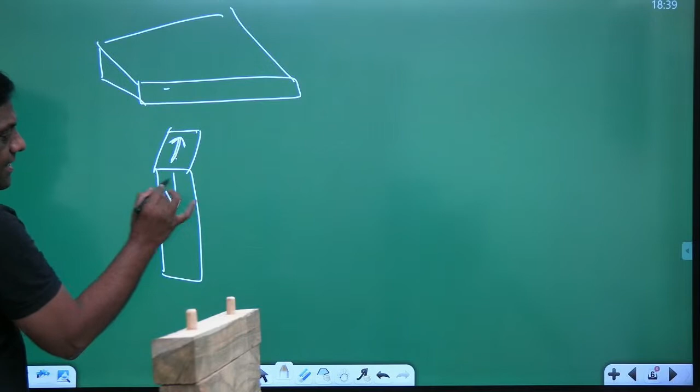What kind of flow is happening, just now you saw. So please, if this top portion is the flange, if the total force is acting in backward direction, it means the flange is exerting a backward force on this web.

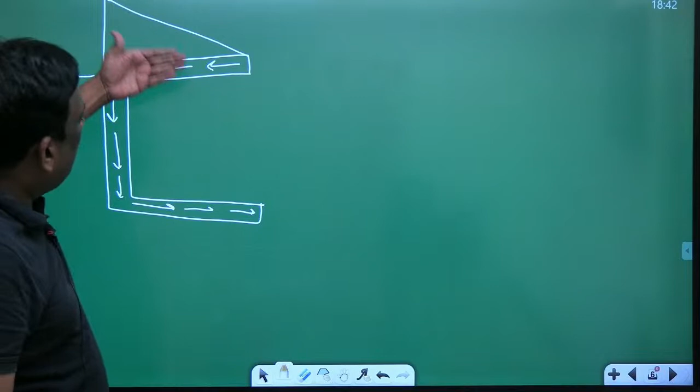Okay, look carefully now. My dear students, this is giving me a net horizontal force. In this direction a net horizontal force is coming. Where are we showing this to you? On the front, on the front face we are showing.

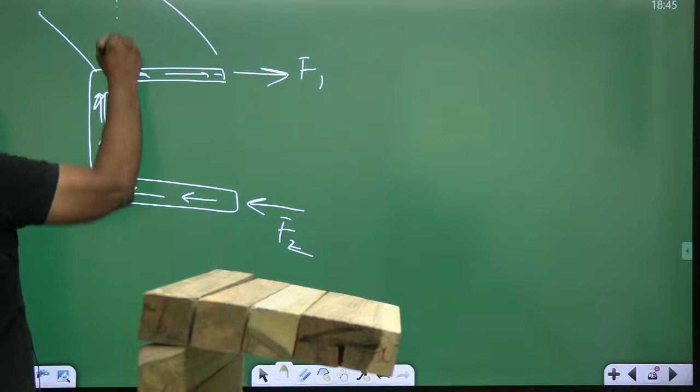So this is balanced with our applied force. You applied force, this force and this force balance out. This applied force is balanced with this. What about this? Yes, these two are also balanced, but they are separated. So what happens, sir? Because these two are separated, there will be twisting in the cross section. That's why you have seen something like this. Please observe clearly, this is the flow of shear.

So I have applied a load P like this. I have applied a load P here, this is the resisting force. The applied load is like this, resisting is like this, no problem. These two are balanced. But what about this? Of course, this rightward and this right, one second, let me take a pen. This force and this force is balanced.

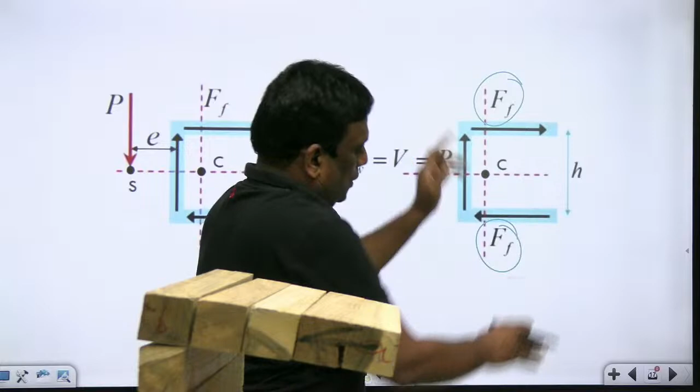Let me take the white marker. Please understand carefully. As there is a flow, a force is coming like this. If this is like this, this one here, this one here, this is applied, and this one is resisting. But these two, even though they are balanced, it is creating a couple because of this force being the same. But don't think that when forces are same, it is equilibrium.

Moment should also balance. They are separated by distance. That's why, due to this force separation, a couple is coming, sir, a couple is coming. So that's why it is twisting. This is the beautiful example of shear flow, and therefore it is twisting, sirs.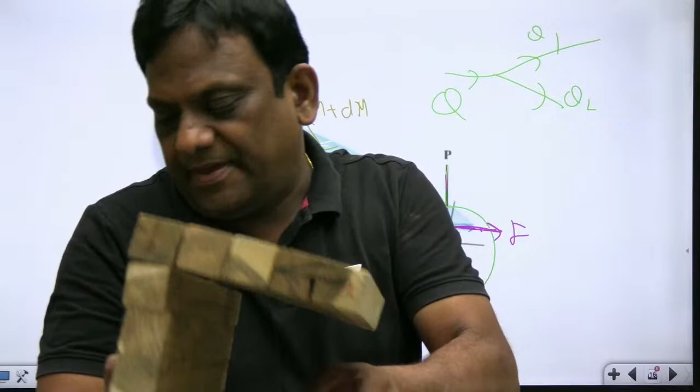Now what will we do, sirs? Thin sections are very weak in shear. They are weak in shear. Torsional shear stresses are developed, and it will fail. It will fail.

Now you tell me, sirs, what do we do now? Now please observe, my dear students. Now what I do is, dear students, what we do is, now carefully observe, where did the figure go?

What I do is, if there is a force like this, it is balanced. Now what will we do? To resist this, what I do is I will not apply force like this, but I will apply it away from this, away from this, away from this. Now see, the moment due to this is causing anti-clockwise, this is causing clockwise.

So anti-clockwise and clockwise moments are balanced. Now there is no twisting. Even if it is unsymmetric, there is no twisting. And by such a distance, see once, such a load is being shifted. Originally the load was here, therefore it was twisting.

But now I shift the load here. Where did I shift it, about the axis of symmetry, meaning this distance is shifted. And now you see, P into E is anti-clockwise, P into E is anti-clockwise, and the moment of this is, FF into H. See, what will its moment be here, sir, FF into H by 2, this is clockwise.

And what will its moment be here, sir, FF into H by 2 clockwise, FF into H by 2 clockwise. And what will this also be? I have taken the moment of this force about this, and what is the moment of this, again FF into H by 2 plus FF into H by 2, so how much will it be? It will be FF into H. So this moment should be equal to this moment, that is FF into H.

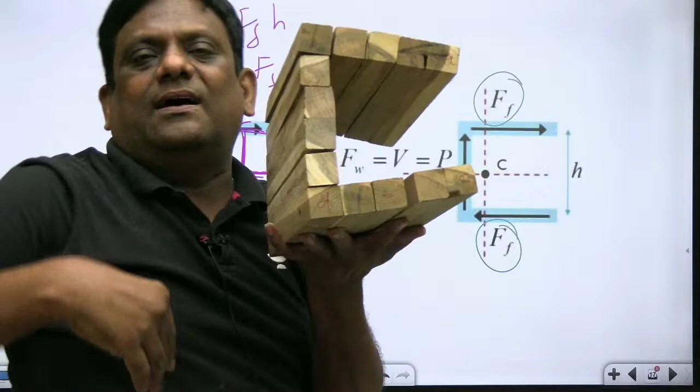And this distance where you are shifting the load, now you may be saying, sir, the channel is like this, how can you see, originally the load was placed here, how can I place the load here, there is no place now, there is no material. Here we'll make some attachment and place the load here. So it was actually twisting like this. Now if I apply, tell me sirs, it was when the load was applied here that it was twisting.

So when I shift the load by some distance, what happens because of this twist? The load causes anti-clockwise moment, this causes clockwise. So P into E is anti-clockwise, and the clockwise should be equal to FF into H, and we have already calculated the shear force. So E is equal to FFH by P, where P is the shear force and FF we have already calculated, I have shown how. And this is the distance by which you should shift the load so that there is no twisting, only bending.

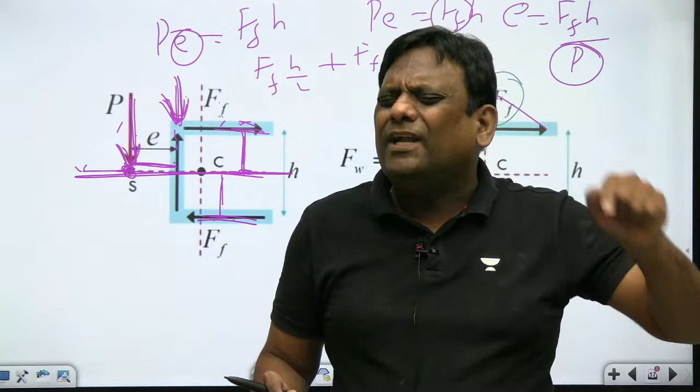That point where the load is shifted from the original position, this distance is nothing but eccentricity E, and this point we call the shear center. What is shear center? It is the point where the load is applied so that there is only bending and there is no twisting. This is a very important concept in thin sections involving unsymmetric bending.

So if we shift the load to this point, what do we call it? It is known as the shear center. Now let me ask you one question, please look here. In this case, where is the shear center? When you have double axis of symmetry, this is one axis, this is another axis, so directly you keep it here. If the load is applied here, there is no twisting, only bending, so this will be the shear center. If it is a circular section, both axes of symmetry intersect at that point.

Whenever you have double axis of symmetry, the intersection of both axes will be the shear center, because if you apply load there, there is no twisting.

Wonderful, sirs. Now please observe here. Up to this, is it clear?

Now if it is a C section, if I apply load here, there is no twisting. But if the load is applied somewhere else like this, there will be twisting.

So therefore what we do is attach an extension here, shift the load, and whatever point you have shifted to, that is the shear center.

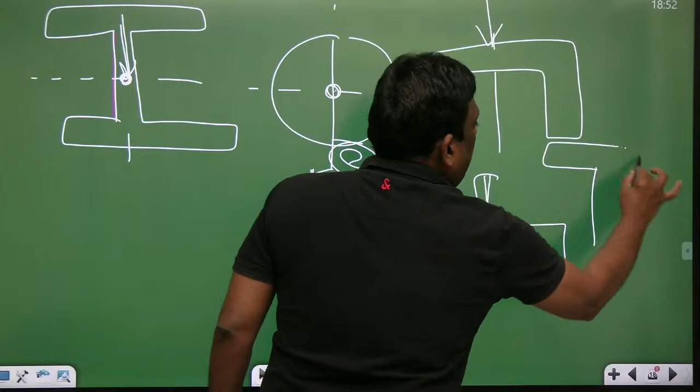Now I'll come up with some more models, like L section, T section, and with this I'll be showing the flow along with the derivations. Please tell me, have you understood, sirs?